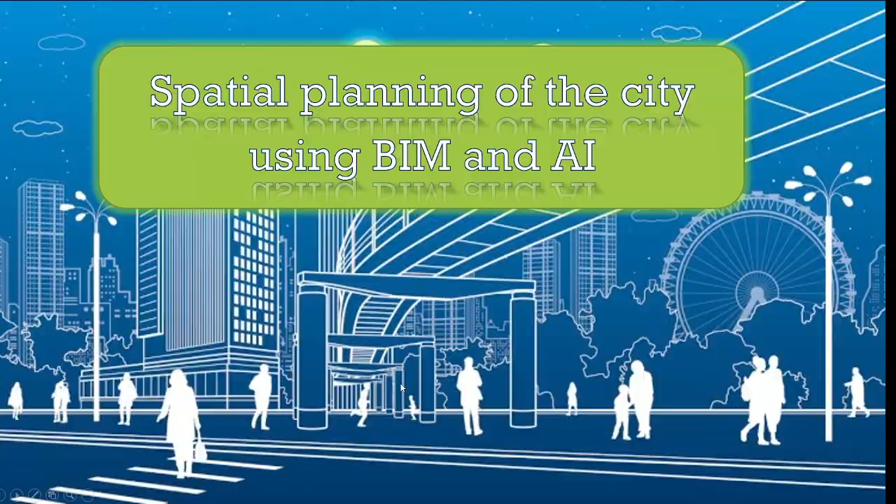For many years, I collaborated with the National Union of Architects of Ukraine, where I was involved in implementation of GIS and helping specialists use CAD systems. For many years, I taught at the University of Advanced Technologies in the field of GIS, cartography, and modern technologies.

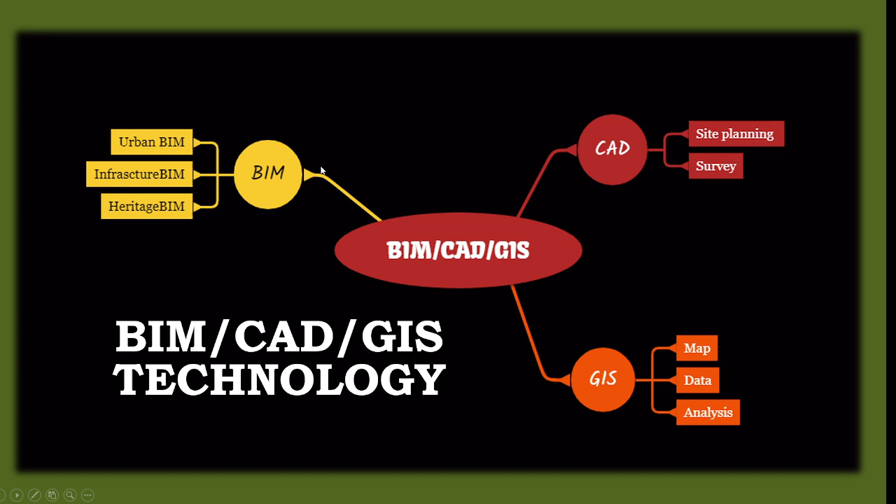The topics demonstrate the announced presentation themes and connectivity with every theme in our lecture. If we see BIM: urban BIM, infrastructure BIM, heritage BIM, CAD, site planning, survey, map data analysis.

Geographic Information System, GIS, consists of integrated computer hardware and software that stores, manages, analyzes, edits, displays, and visualizes geographic data. Geographic information systems are used in many technologies, processes and techniques. They apply to various operations and numerous applications that relate to engineering, planning, management, transport, logistics, insurance, telecommunication, and business. Recently, GIS has changed a lot thanks to the introduction of artificial intelligence, machine learning, digital twin technologies, and big data, and others.

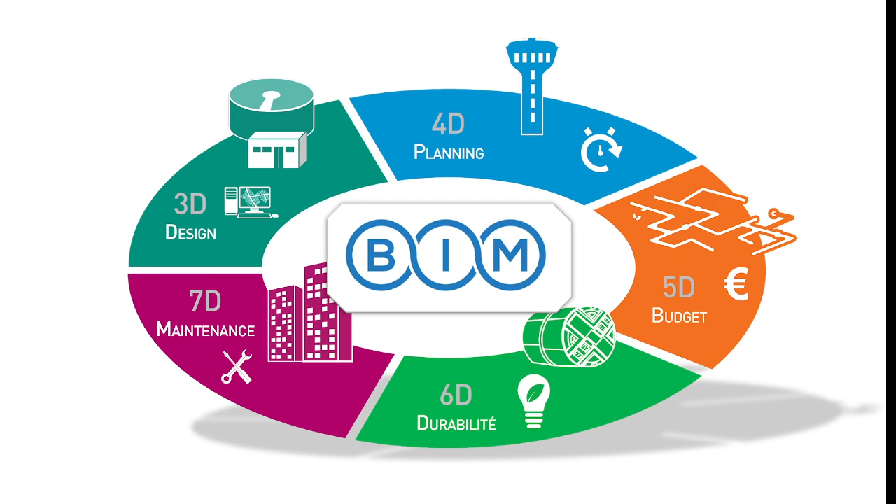Companies presenting BIM technology, the biggest companies, are Autodesk, Hexagon, Bentley Systems, and Graphisoft. Graphisoft is a company part of the Nemetschek concern.

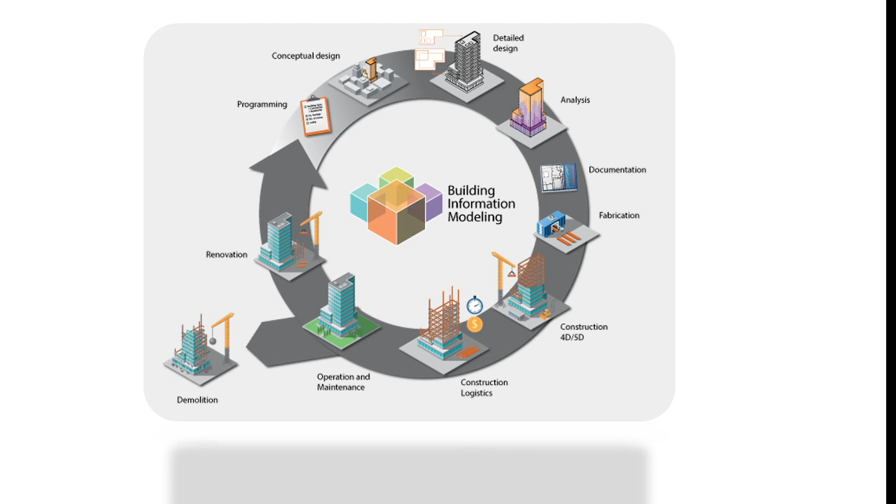BIM includes conceptual design, programming, detailed design, analysis, information modeling, building, manufacturing, documentation, repair, construction, 4D, 5D, demolition, operation and service, construction, logistics. Explanation: 4D is 3D plus time, 5D is plus cost, price.

What is CAD? CAD, or computer aided design and drafting, before called CADD, is technology designed for creators to design, draft, and produce technical documentation, replacing manual hand-drawn and drafting technologies with digital-first processes. Whether you are an architect, designer, or engineer, you have probably used 2D or 3D CAD programs.

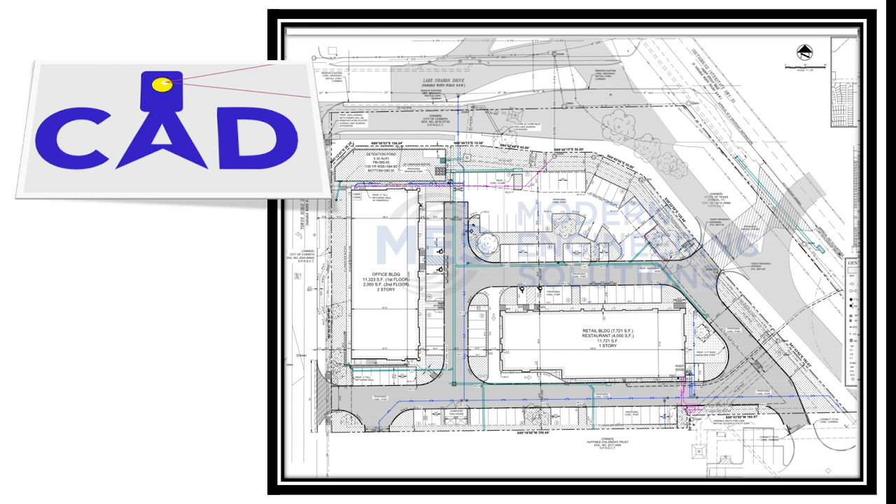What is CAD in the context of urban planning? CAD enables urban planners to create, modify, and analyze digital models of urban environments, including buildings, infrastructure, and landscapes.

What is artificial intelligence? Artificial intelligence is based on machine learning. Machine learning uses complex data to train computers, recognition programs, pattern based on algorithms.

Neural networks: computer systems designed to simulate neurons in the brain. Natural language processing: the ability to understand speech and understand and analyze documents. Robotics: machines that can help people without actual human intervention.

Artificial intelligence is an intelligence of machines or software, as opposed to the intelligence of humans and animals. It is also a field of computer science that develops and studies intelligent machines. AI can also refer to the machines themselves.

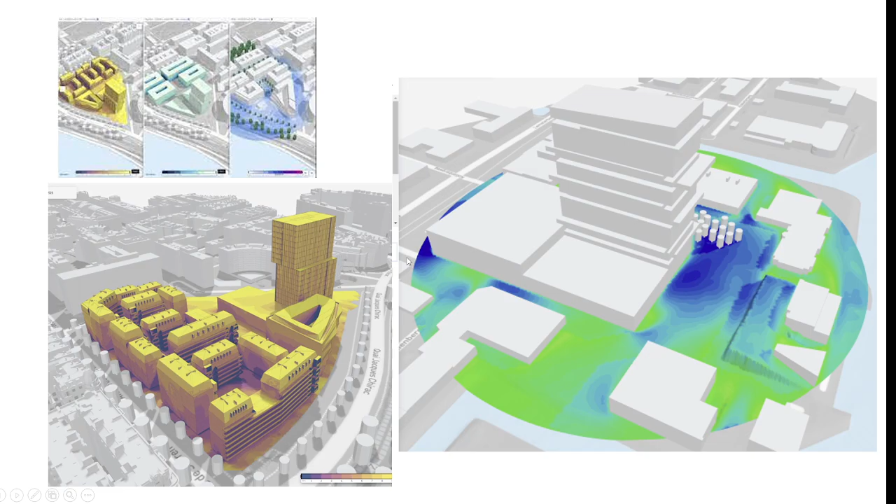This movie demonstrates some possibilities of the software.

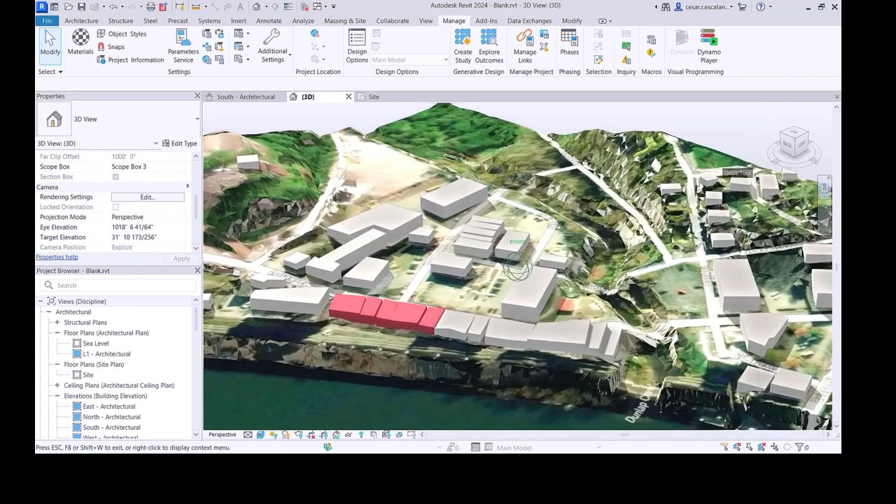Select the proposal you want to transfer and choose Send to Revit. In Revit, find the Forma add-in under the Massing and Site tab. Use the Load options to filter out which elements will be brought into Revit and how these elements will be represented. Use the Load Proposal tool to preview and transfer your proposal elements.

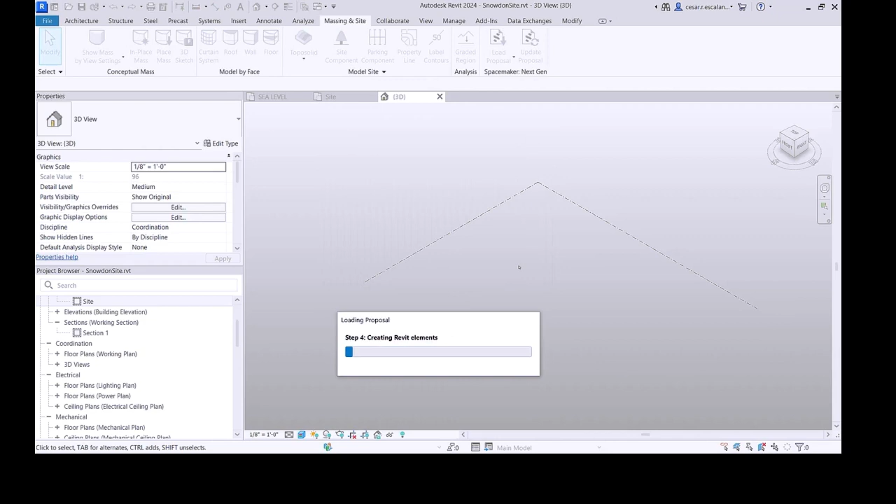About digital twin. A digital twin is a digital model of the intended or actual real-world physical products, systems, or processes. That serves as the effectively indisputable digital counterpart for practical purposes, such as simulation, integration, testing, monitoring, and maintenance.

The digital twin has been intended from its initial introduction to be the underlying premise for product lifecycle management and exists throughout the entire lifecycle of the physical entity it represents. Since information is granular, the digital twin represented is determined by the value-based use case it's created to implement.